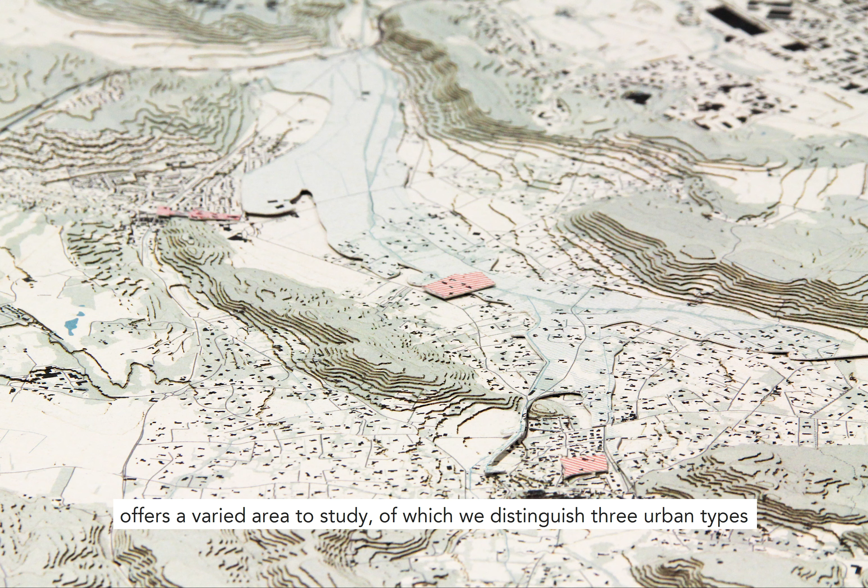In addition, the urban situation of Cabriès and its many urban types offer a varied area to study, of which we distinguish 3 urban types who define the project densities: sparse individual housing, housing estates, and group housing in the old center.

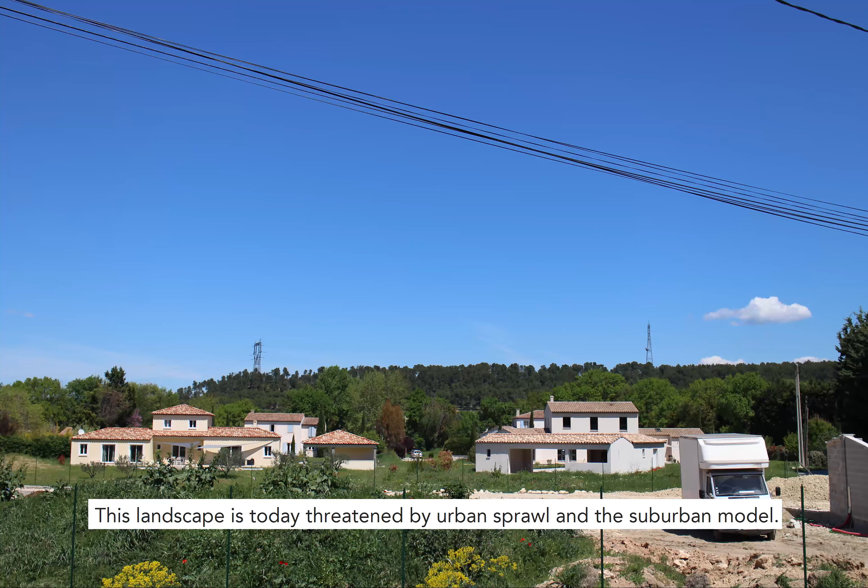The landscape of Cabriès, typical of the Mediterranean, is made up of horizontal strata: the massif, the foothills, and the agricultural plains. This landscape is today threatened by urban sprawl and the suburban model. The suburban model means to live in an individual universe responding to a collective order. It's an artificial landscape that replaces existing agriculture to the detriment of the history of these territories, the detached house responding to a demand for which only the architecture seems to be absent.

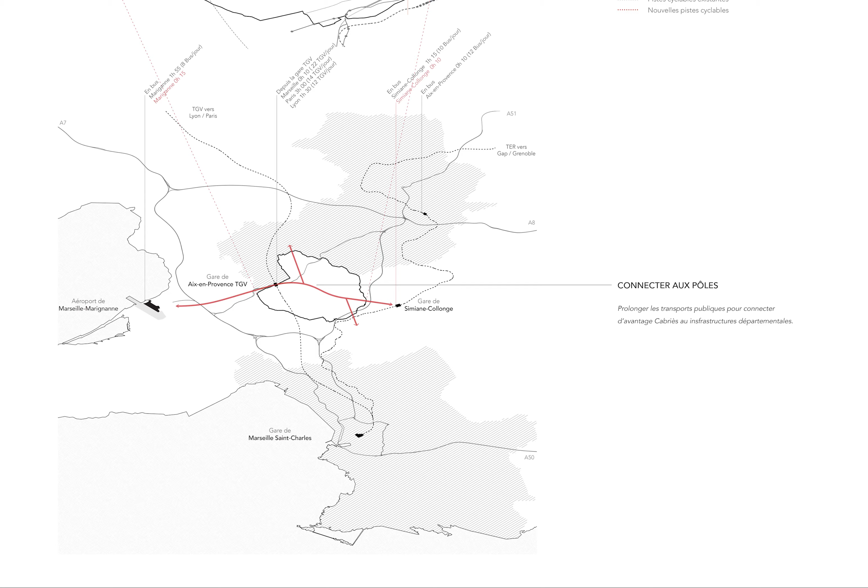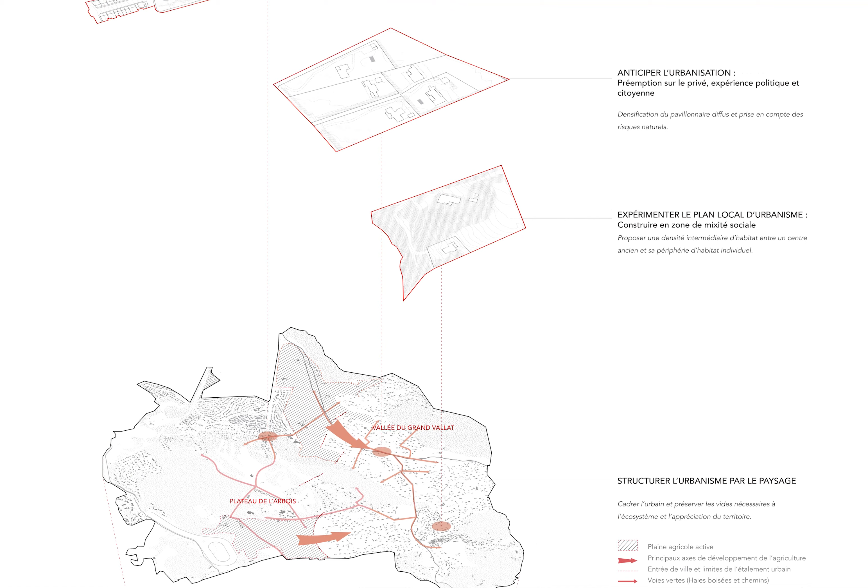Our strategy at the departmental scale is to reconnect to the department infrastructure. At the municipality level, strengthening soft mobility and agriculture. At the local scale, we introduce by 3 proposals a new densification strategy to preserve landscapes.

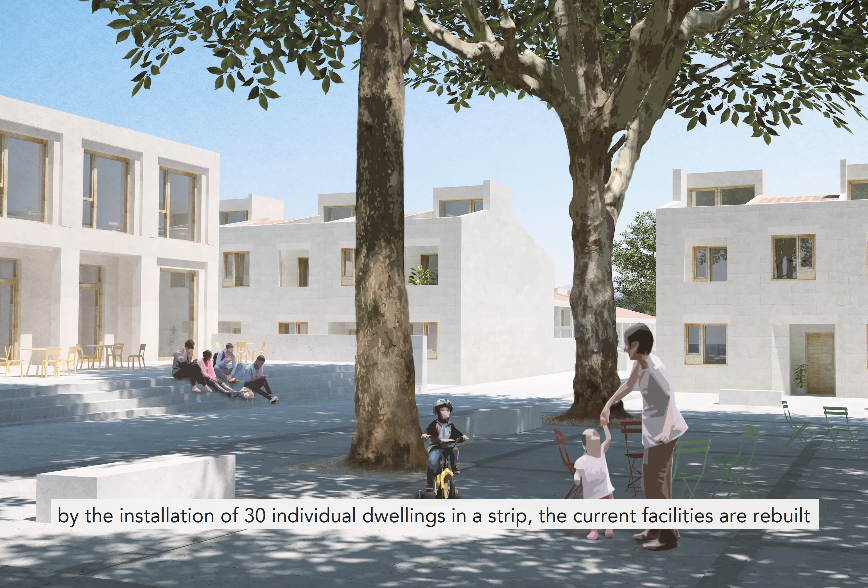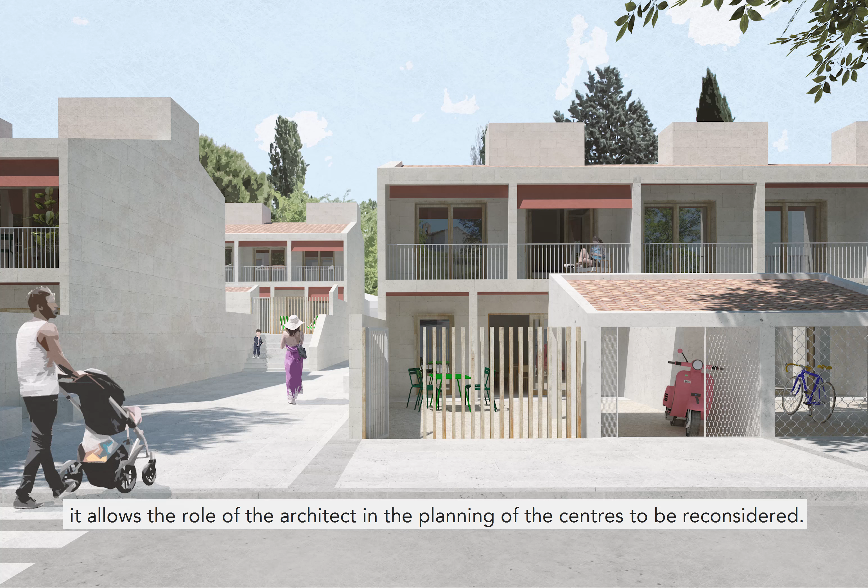In Calas, we reveal the pre-existing features of the site, historic castle, basin axis, by the installation of 30 individual dwellings in a strip. The current facilities are rebuilt and the wall is connected by a new public space. This project stands as a critique to its built context. By proposing a clear position for the public space, the private house and the parking, it allows the role of the architect in the planning of the centers to be reconsidered.

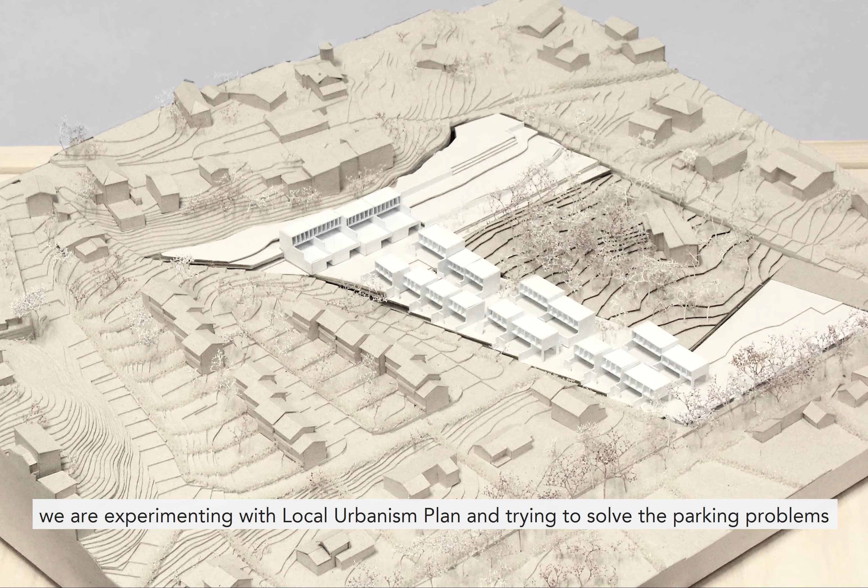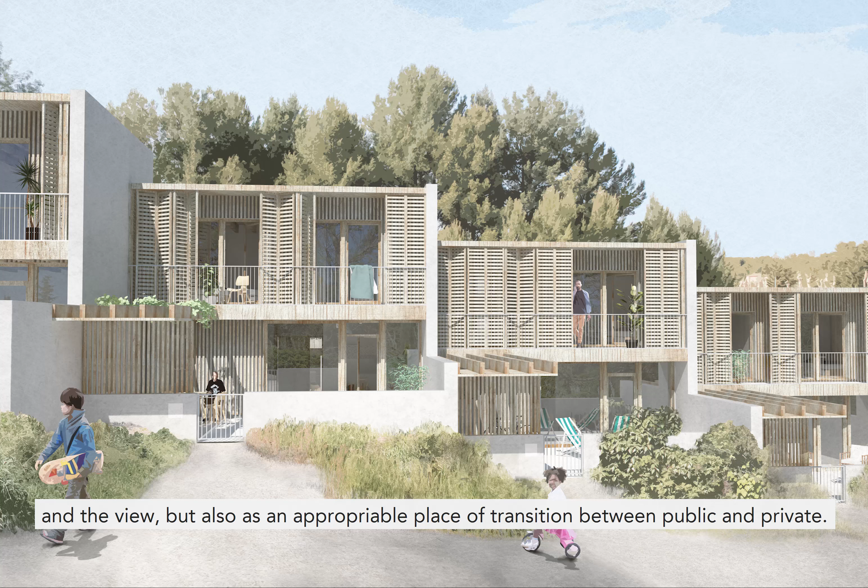Cabriès, on its rocky peak, is the symbol of the township. By building 26 individual and stacked social housing units on the slope, we are experimenting with local urbanism plan and trying to solve the parking problem that pollutes the village. As the image of the provincial villages, the mineral and pedestrian public space at the center allows to go up to the historical core and the view, but also as an appropriable place of transition between public and private.

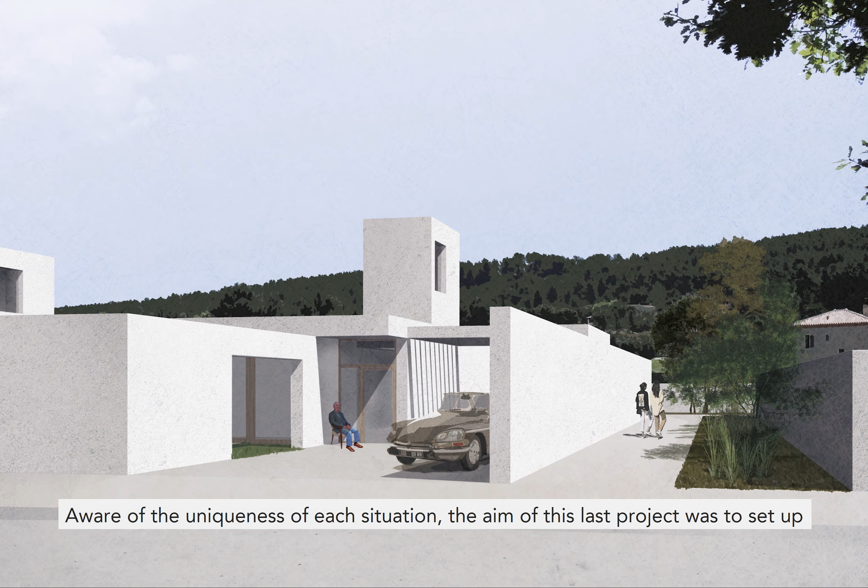In the continuity of the work of Serena Palazzi, the project proposed a political and citizen experience around the question of inhabitation, the problems of flood zones and agriculture on private plots. Aware of the uniqueness of each situation, the aim of this last project was to set up a framework for the establishment of a collective order.

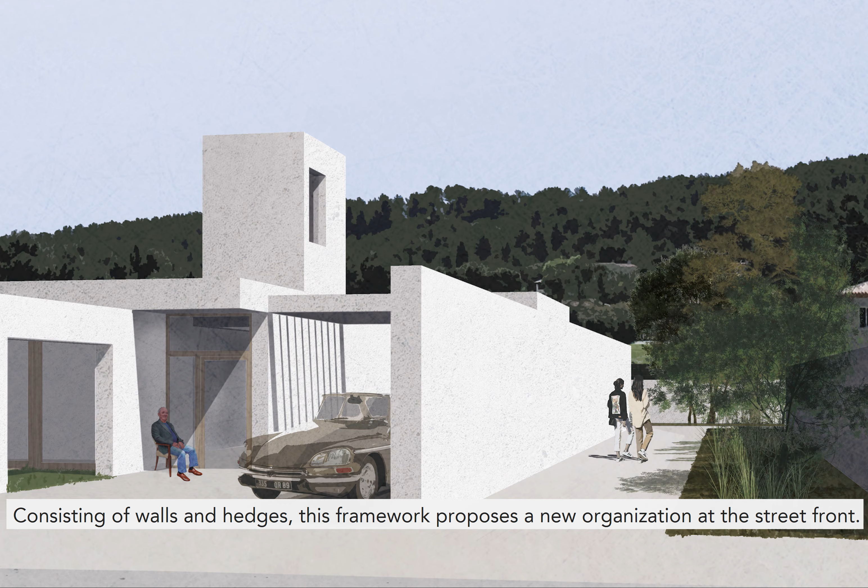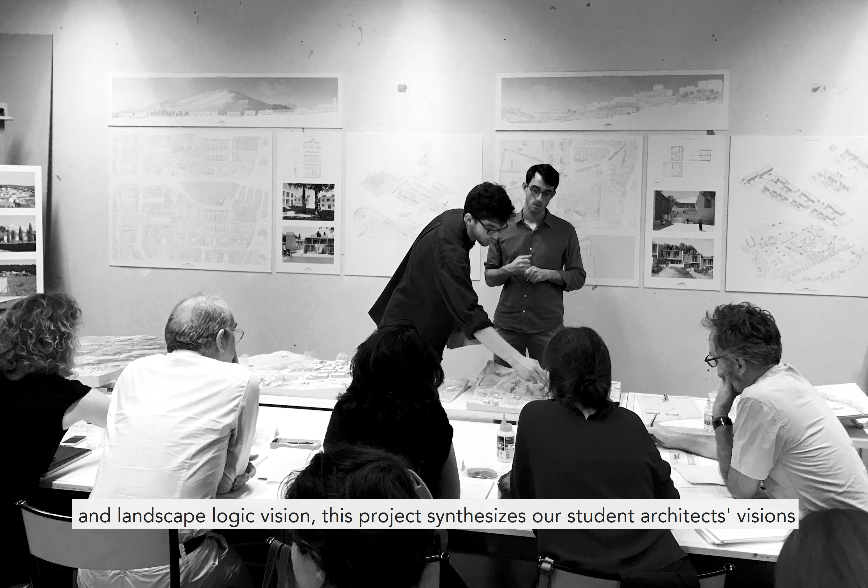Consisting of walls and hedges, this framework proposed a new organization at the street front. These walls constitute the first strata of the landscape. The floors that cross this one open up to the other strata. Supported by the conviction that the territory cannot be constituted without a collective and landscape vision, this project synthesizes our student architect visions on individual housing and the environment.